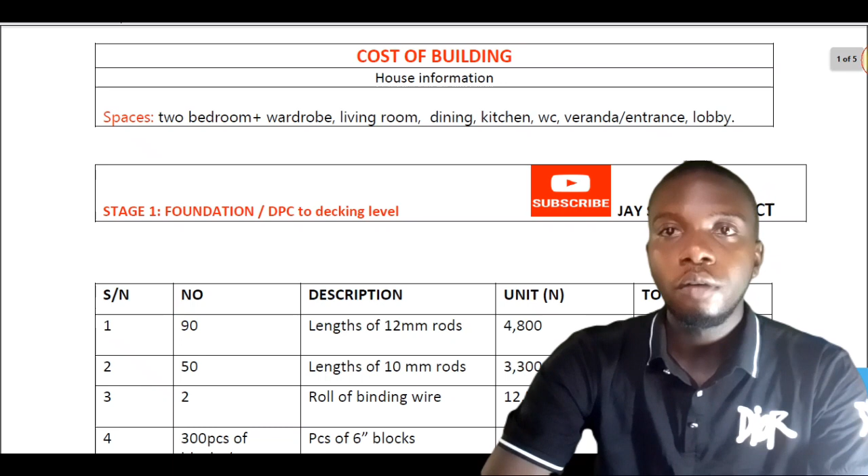So looking at the cost of materials now, we have 90 lengths of 12 rods at the price of 4,800. We have 50 lengths of 10 rods. We have 2 rolls of binding wire. We have 300 pieces of blocks, that is 6 inches blocks, that is what is going to be used for this building.

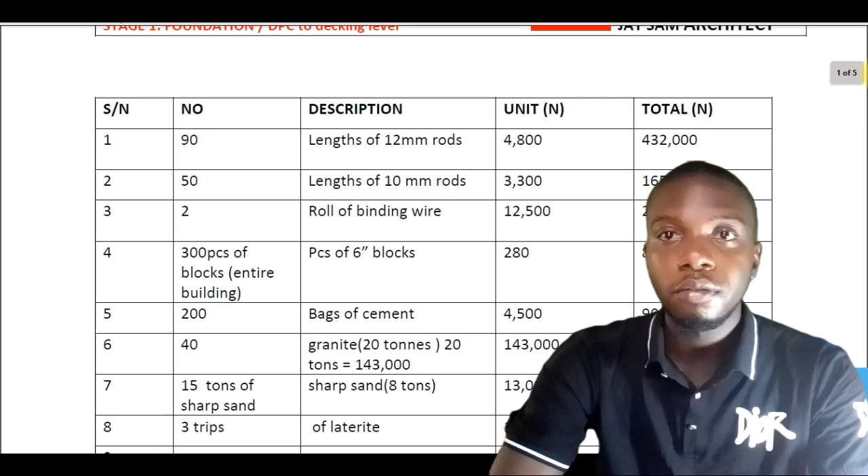We have 200 bags of cement. We have 40 tons of granite, and for a ton of granite it actually costs... 20 tons of granite cost 143,000 naira. We have 15 tons of sharp sand, 3 trips of laterite.

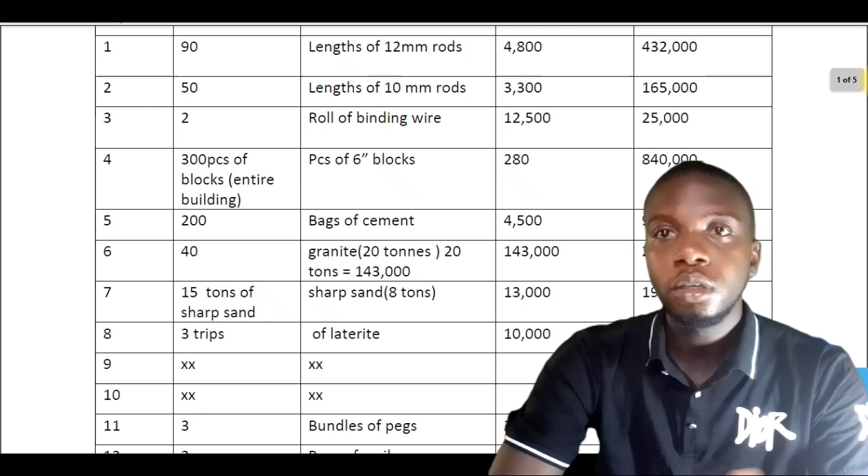Then we also bought 3 bundles of pegs, that is for the pegging of the building. We also bought 2 bags of nails at the price of 12,500 naira for each bag.

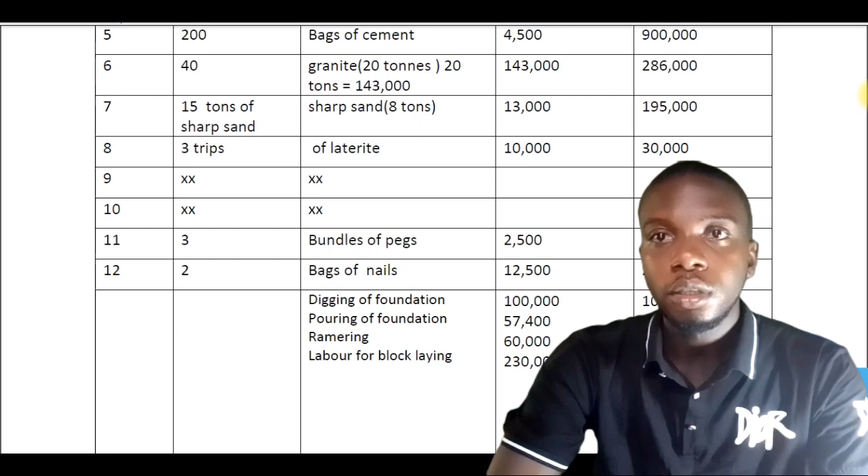So for the labor here, for the digging of the foundation, we have paid 100,000 naira for it. For the pouring of the foundation, we have paid 57,400 naira. For the rammering, the setting of the concrete, we have paid 60,000 naira for that. For the labor, for the block laying, we have paid a total of 230,000 naira for this.

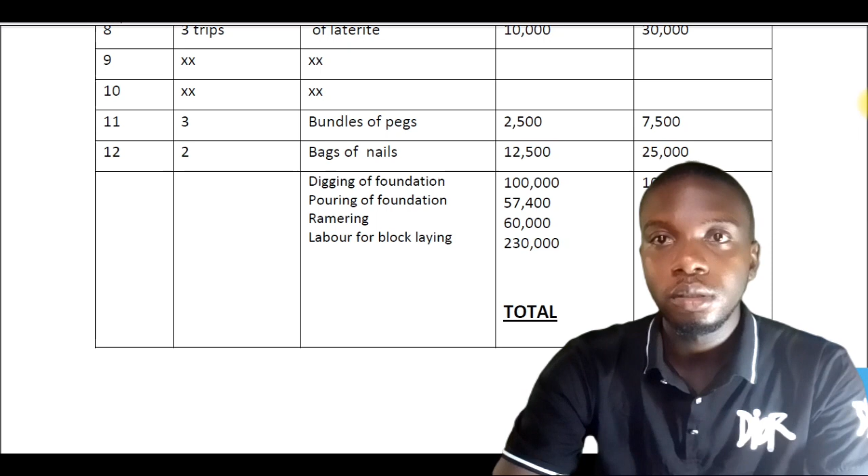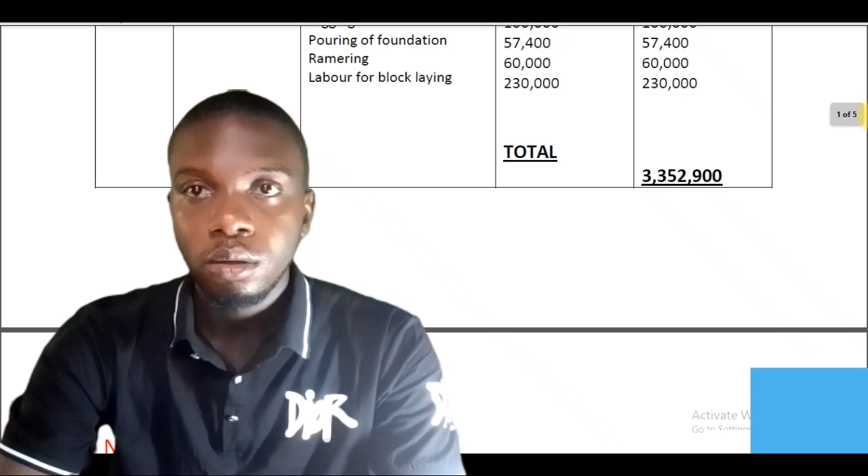So you can see the total cost here is at 3.3 million naira. So moving forward, we have some notes for you here.

If you're building in Nigeria, you would like to look at this note and take some observations from it.

You have to employ qualified people to build your house. You do not need to employ people just because they are related to you. Always make sure you employ qualified people to build your house in Nigeria.

Moving forward, you also have to be ahead of the building prices in Nigeria. Building material prices change a lot, week by week, daily. You just have to be ahead of the market to be able to build effortlessly, and make sure you buy your building materials from the most economical place.

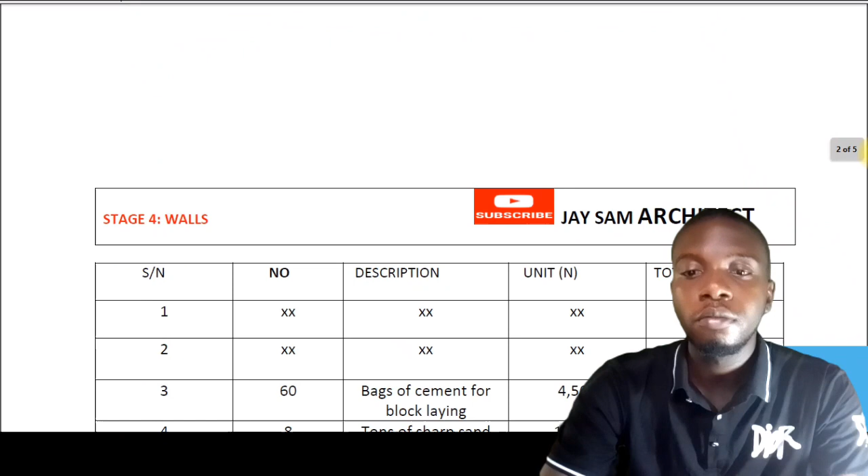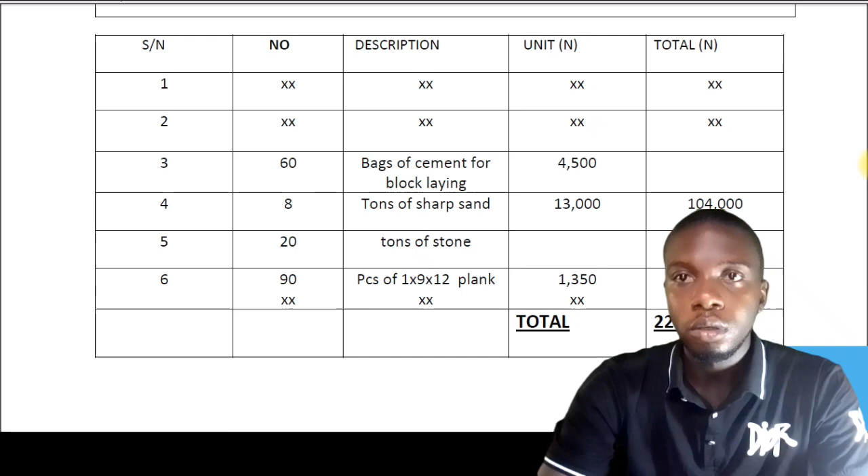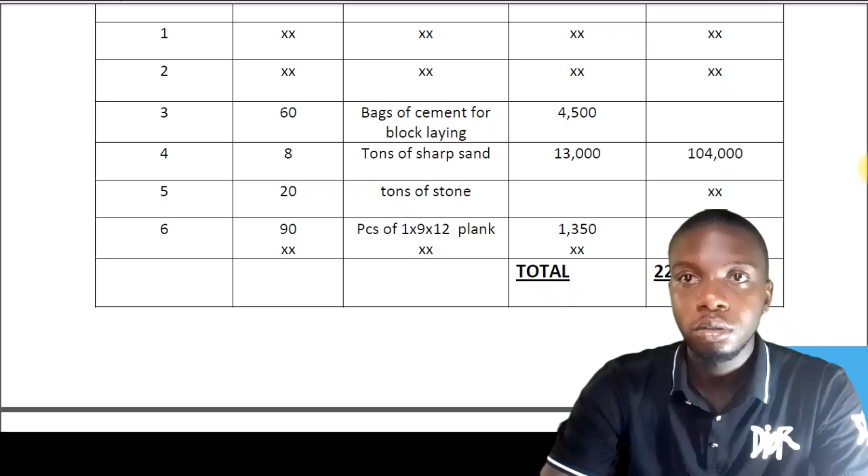For the building walls, we bought 60 bags of cement for the block laying of the 2-bedroom flat apartment, and 8 tons of sharp sand for that also. We also bought 20 tons of stones for the lintels, and 90 pieces of plank for the boardings and other structural parts of this building. So for the total, 225,500 naira is the total for the walls.

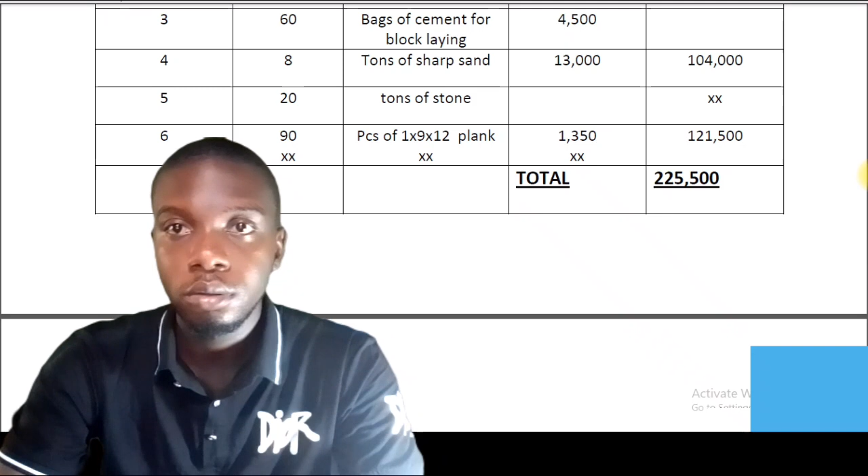Moving forward, here's a note for you: start your building during the dry season because of the rainy season we have in Nigeria. Always schedule your building projects during the dry season to save you from running into the rain.

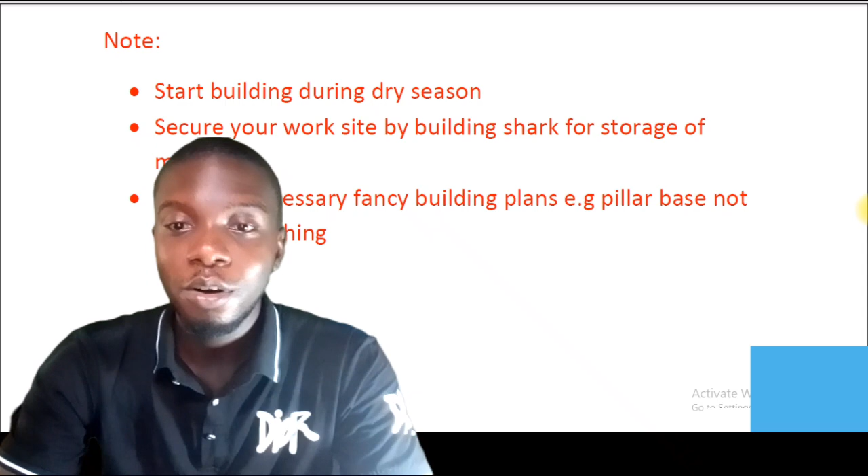Secure your work site by building storage facilities where you can put your cement and nails so they won't get rusted. If the rain falls on them, most of your materials will get damaged, so you always have to look out for this type of thing.

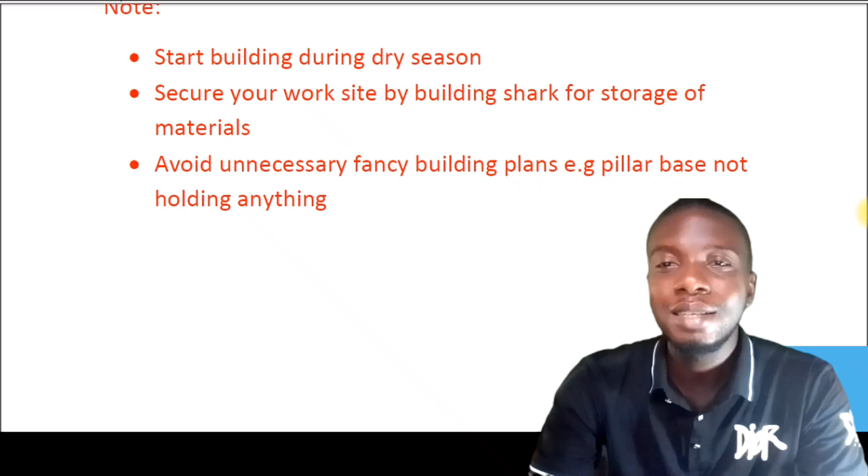For the building plans, always avoid unnecessary fancy buildings from building designers, because on site these fancy buildings can cost you a lot of materials to actually actualize your building dream or your dream house.

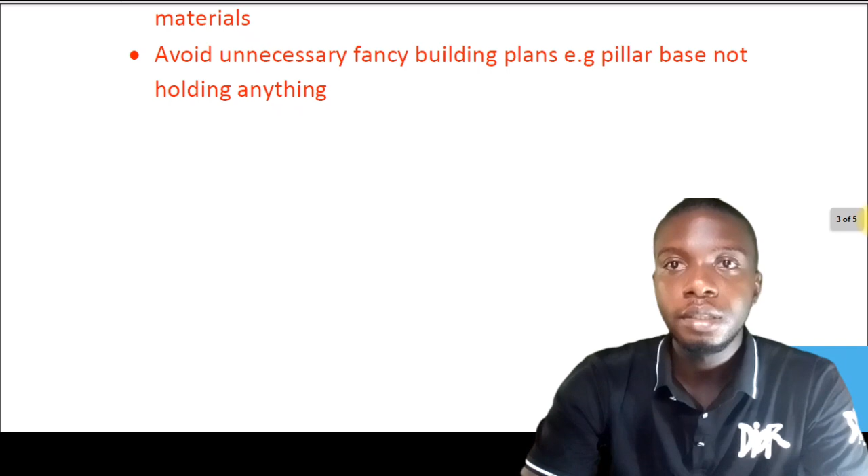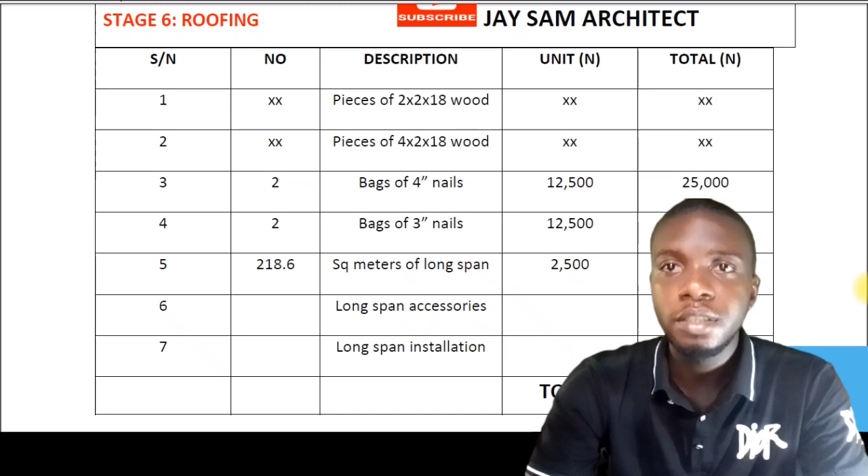For the roofing, these are the materials we used: 2 bags of 4-inch nails at the price of 12,500 naira, and 2 bags of 3-inch nails also used for this building. We used 218.6 square meters of long span aluminum zinc at 2,500 naira per unit. For the long span installation of this zinc, we paid a total of 150,000 naira for the installation of this roofing sheet.

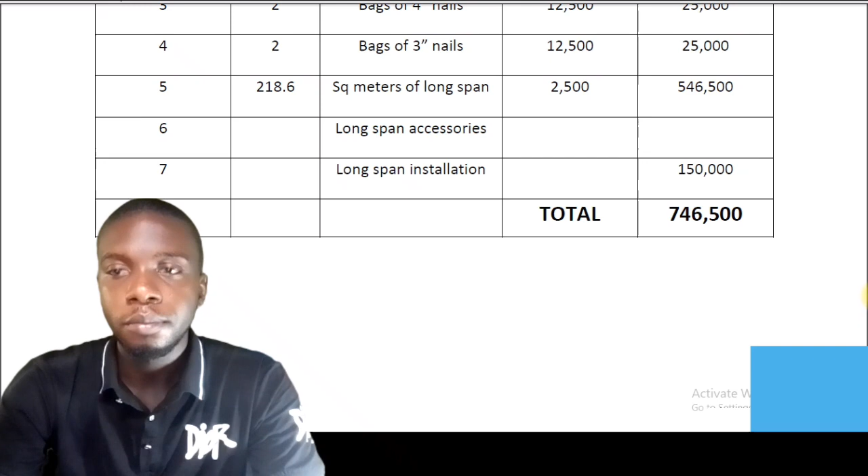Looking at the totals: for the foundation we have 3.3 million naira, for the walls 225,500 naira, and for the roofing we spent 746,500 naira. For the miscellaneous, we arrived at a total of 1 million naira after checking our expenditures and unforeseen costs. The labor is actually included in this, so these are the totals we have arrived at.

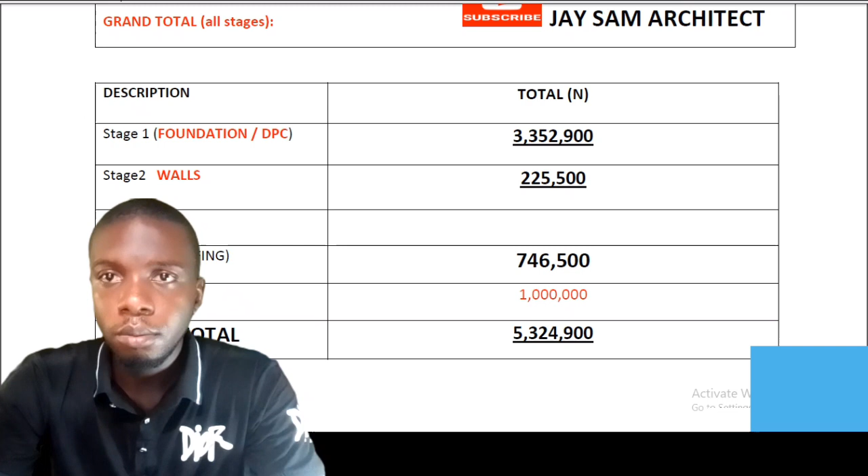For building a two-bedroom flat apartment in Cross River State, Calabar, it has cost us 5.3 million naira to build a two-bedroom double flat unit, so we have two bedrooms and two bedrooms. I hope you get the idea. Building a single two-bedroom flat may cost less than this. This is more like building a four-bedroom structure, but it's way bigger than four bedrooms. I hope you understand this.